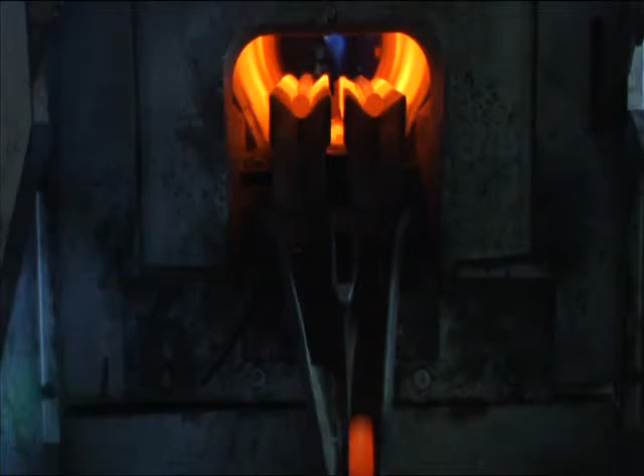Ever since their foundation in 1949, the 2 companies have stood out for their painstaking attention to the functional and formal performances of each machined part. Their specialization in noble, delicate metals like brass and copper have positioned them among the most advanced European firms in the sector.

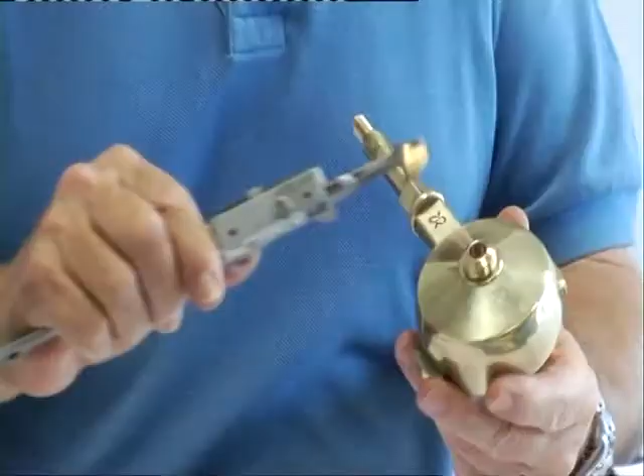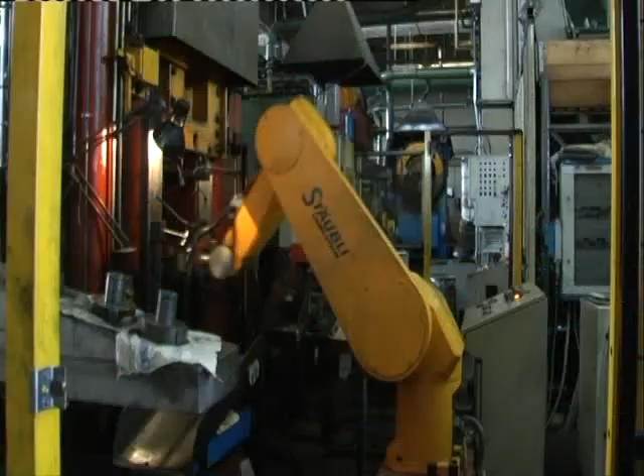Over time, the centralized management of the 2 companies and the resulting complementary operations has proved its worth. The transfer of experiences is continuous and acts as a multiplier of each firm's capabilities.

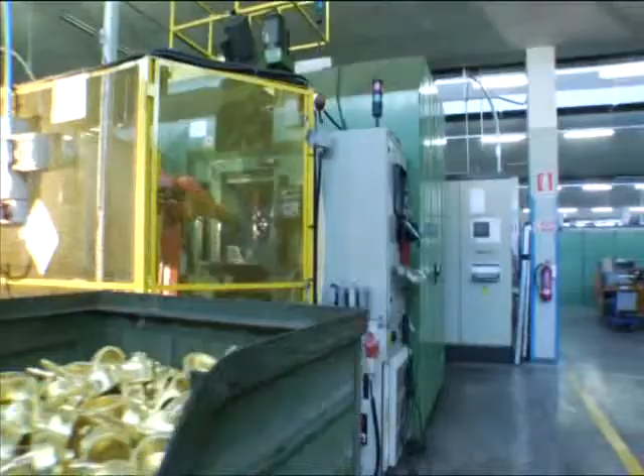In the 1970s, Tridella Brass and GST set up a group that is able to provide a complete service ever more oriented to customer satisfaction, even when demands are difficult and complex. For decades, the group collaboration with major Italian and foreign manufacturers of coffee machines has continued without interruption.

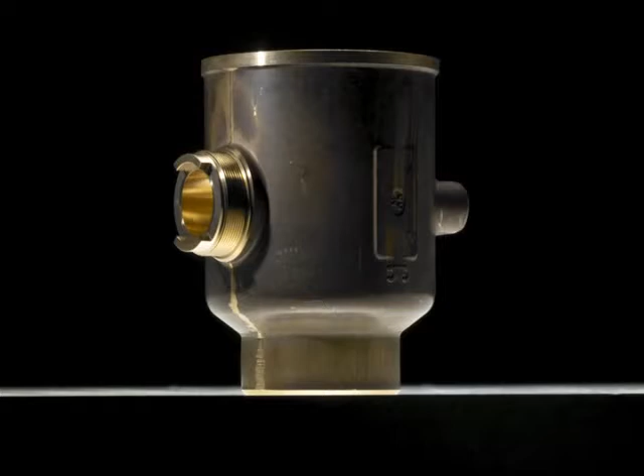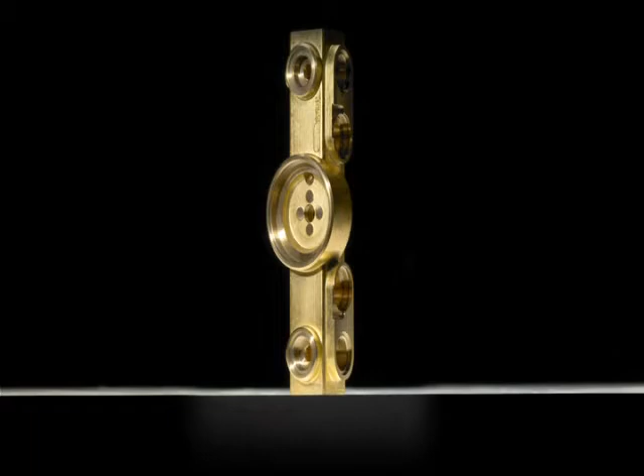Maximum flexibility, enhanced product quality and across-the-board reliability, increased production capacity, time savings, cost cutting. These are the challenges that the Tridella GST group regularly takes on, meeting them through systematic investment in the best qualified professionals and the foremost technologies.

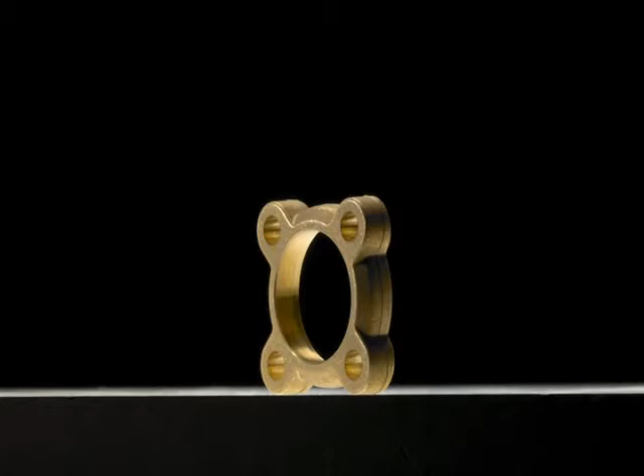Updating of plant and equipment is constant, as testified by the use of cutting-edge anthropomorphic robots that enable continuous production cycles.

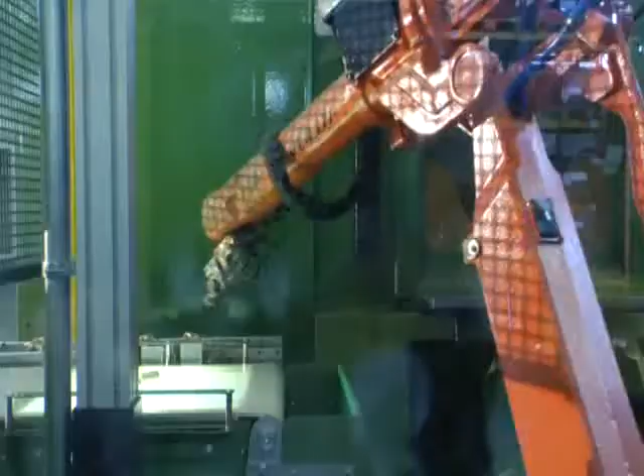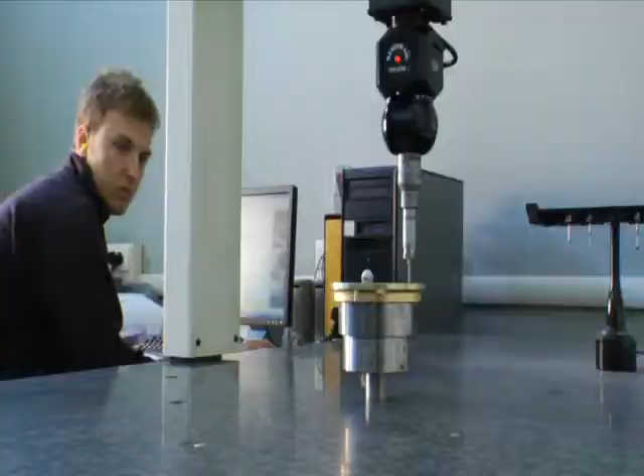The partnership with the client is global and ends only with full approval of the finished product. The whole procedure is followed step by step with meticulous quality controls in every phase.

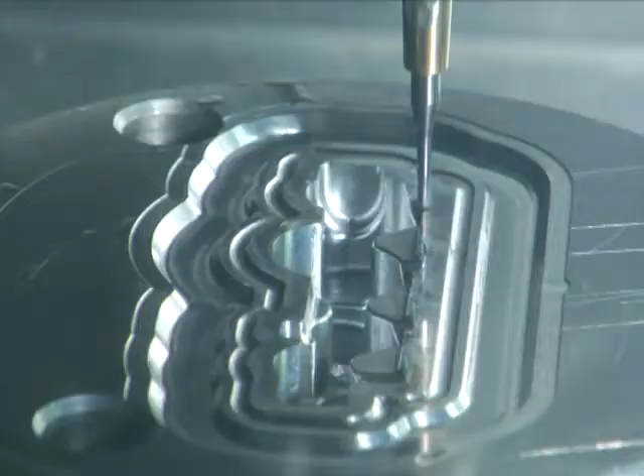From the customer's drawing, which is reproduced in CAD and then transferred to the milling centers for making the die, to the hot pressing of the brass and copper, to the machining, and on to the finishing and assembly operations. The sampling is accomplished very quickly.

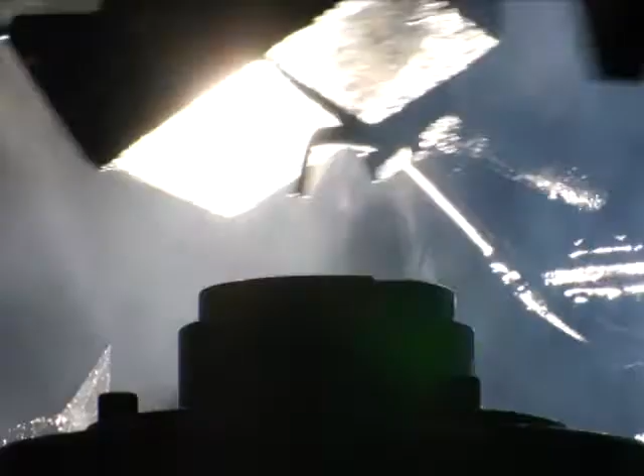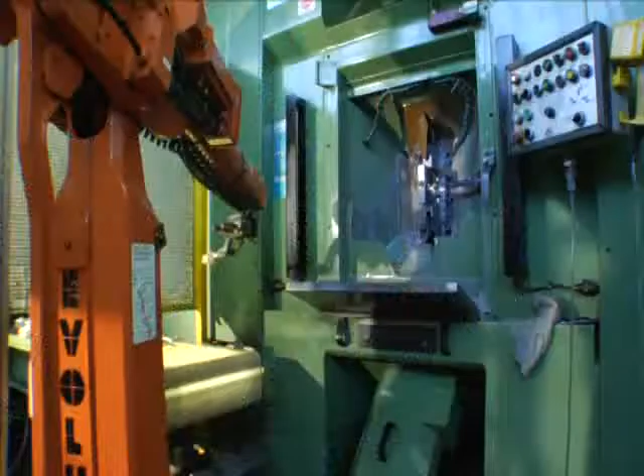The press shop has machines able to make elements with weights ranging from 20 grams to 5 kilos. Automation and process control applied to the transfers and to the assembly and testing machines make it possible to respond swiftly to requests for large series, but in particular cases, small batches can be produced as well.

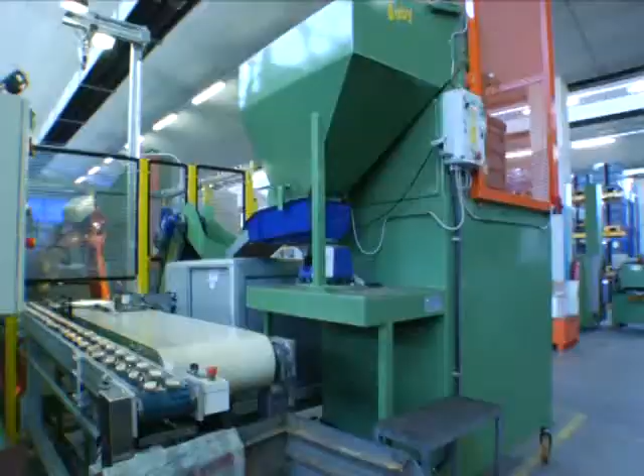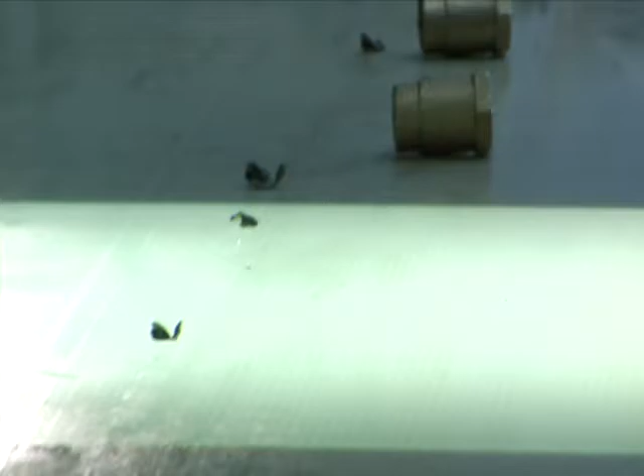Rubinetteria GST covers a wide range of functions. On the one hand, it designs and manufactures its own high reliability safety valves and small parts. On the other, it makes complete valves and taps to customers' designs and machines brass parts for third parties.

Here, the quality control always extends through to perfect functional testing.

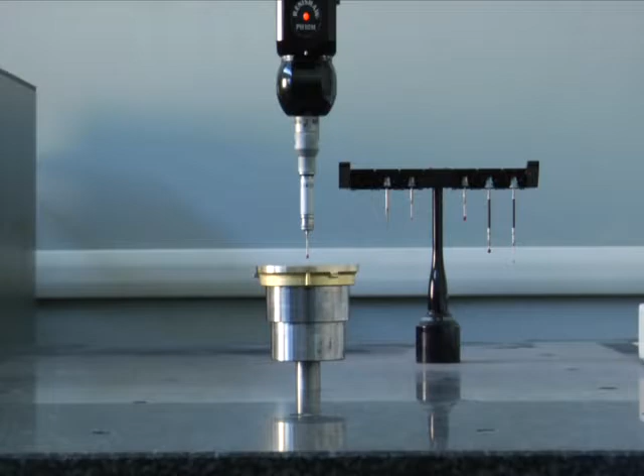Special attention is reserved to the area of home design, with the ability to adapt rigorously both to the more linear realizations and to more elaborate, high aesthetic impact pieces.

The quality of each product, supplied ready for use and admiration by the end customer, is always evident, recognizable at a glance.

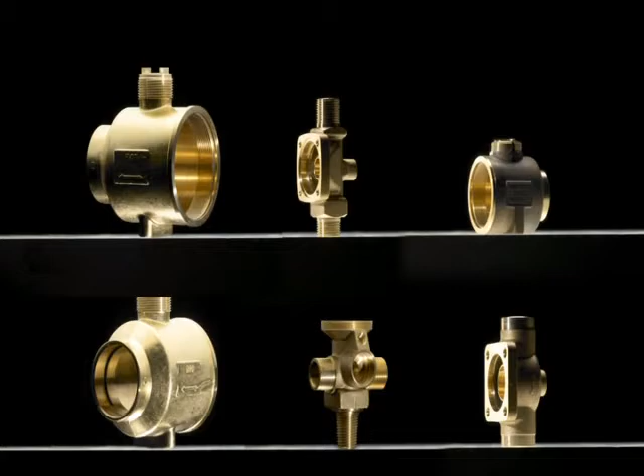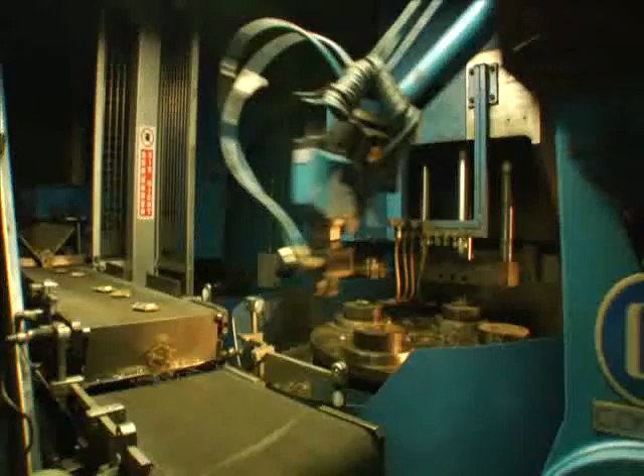Tridella Brass and Rubinetteria GST. 2 great manufacturers guided by a shared strategy, quick to respond to the needs of today and to anticipate those of tomorrow. 2 signatures of Made in Italy, stamped in the noble materials of copper and brass.